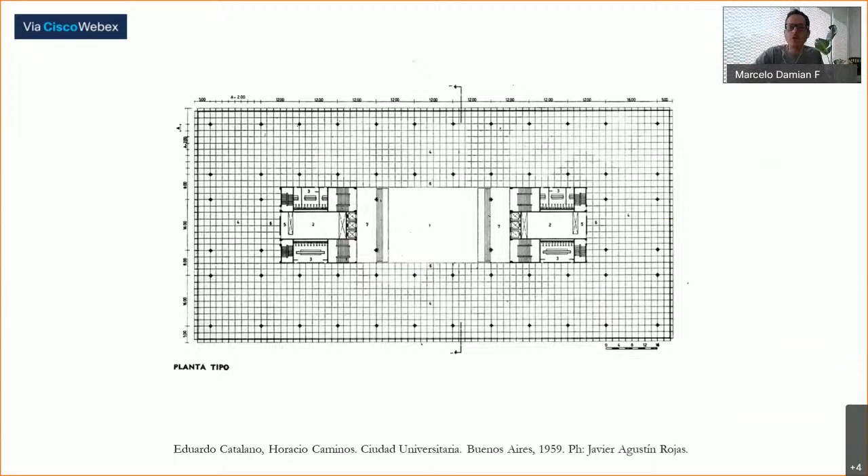So all the theories that we were taught about this building didn't fit well with our point of view. So that uncomfortable situation, uncomfortable in terms of strict discipline, pushed us forward and made us try to see the plan of this building as a strategy for indetermination of use. Maybe closer to the radical Italians, Archizoom or something like that in our minds, rather than other signs of functionalism, rationalism, etc. For us, this plan, this strategy, was a way to organize freedom. To let the contingency and the everyday life finish the work. Try to think about architecture as an infrastructure for the event.

So if our practice agenda started by creating a self-designed contract with the past, those stacked platforms were the best place to also observe the present, to see the things around you and also the things a little far away. So to choose a specific present was another moment of this same project. For us, Abalos y Herreros represented, like no other office at that time, a strong commitment with the present. The project still emanates an optimism that makes it possible to think that each occasion truly hides the possibility to develop an architecture capable of moving us.

Through a national competition for students, we had the chance to spend three years doing our PhD and working in Spain, close enough to see with our own eyes the production of the offices that captivated us. Of course, not only in Spain. For us, every weekend was a chance to rent a car, drive a few hours—not so many from an Argentinian point of view—and with a lot of time and a lot of faith, jump over a fence to see with no invitation at all how things were being made.

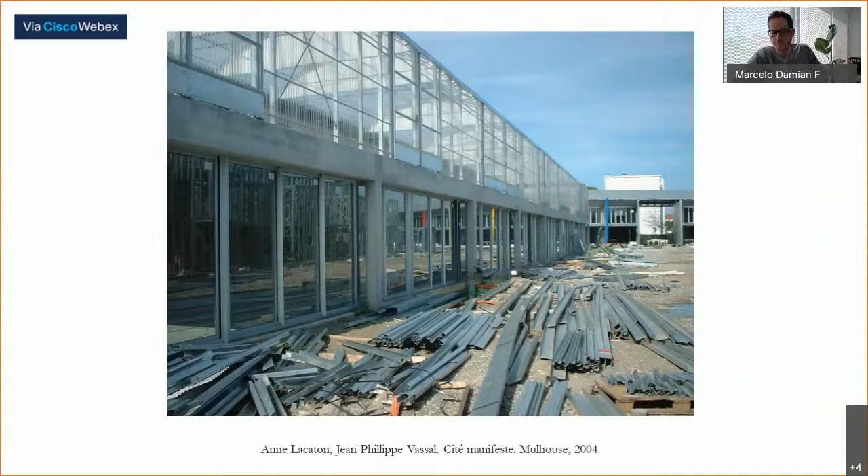Visiting Mulhouse housing by Lacaton and Vassal was very important for us to find out about the possibility of creating a consistent practice, focusing on things that you can insist with, things that you can try over again and again. At that time, we were sure that we wanted to have a practice that let us practice architecture. That seems like a simple idea and kind of obvious, but we believe it is not.

Because for doing so, you have to choose the right position, the right environment. For us, it meant looking back from the distance at Buenos Aires and trying to see it in a totally different way, focusing for the first time on those thousands of plots floating in the air. For us, those infrastructure leftovers were privileged places related to the sky, the only natural element you can find in this big sea of concrete. So this was the place we chose to build our version of a primitive hut—not in the natural soil, but on top of the city, surrounded by it, but without any urban references.

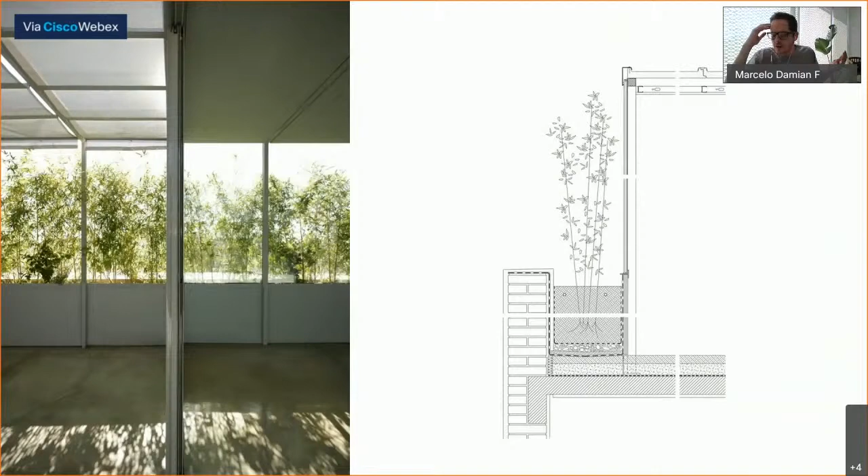So the pavilion steps back from the edge of the building in order to create a perimeter of plants that filters the light. We used the same structural design for two kinds of spaces: a filtered exterior on one hand, and a gardened interior on the other. This primitive hut is nothing but an open plan related to urban hedonism, with no specific use or program, because the existing organization already solved that problem.

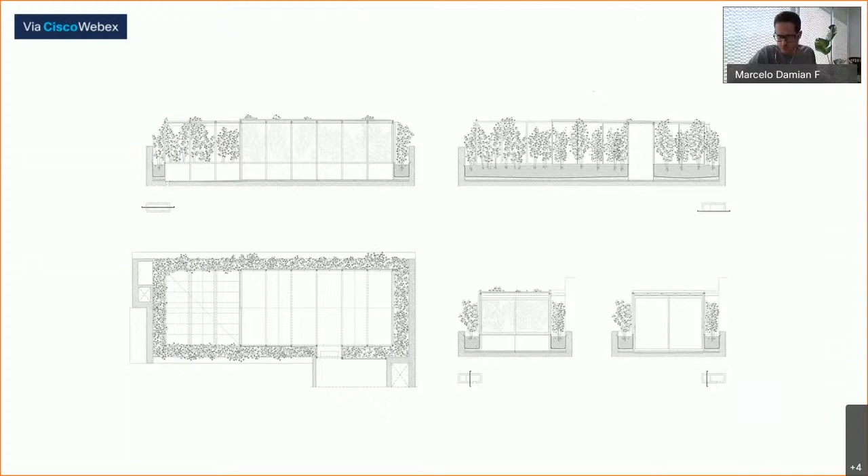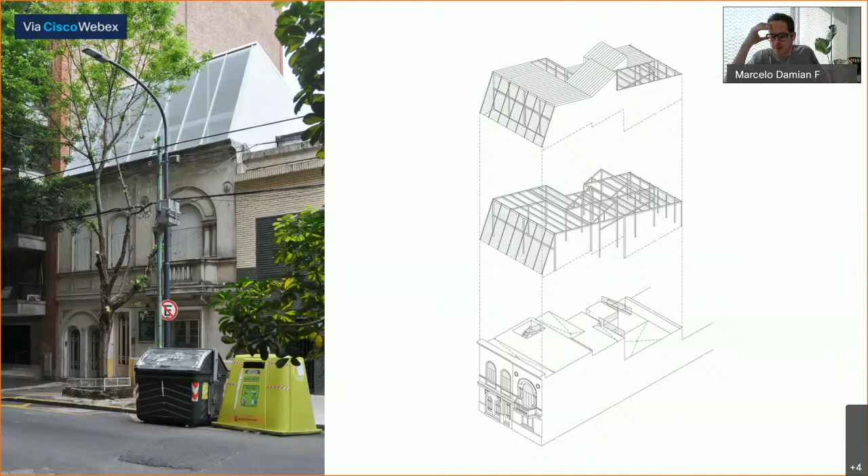These are the plots that I am talking about. This was the place for us to rearrange the design tools that we discovered through our conversation with the past and present of the discipline—working with the same light elements to build a roof that the house never had, a roof made of air. Using the urban fabric as our earth crust, finding this new incredible topography, like finding a sloping new ground in the middle of the Pampas plain soil.

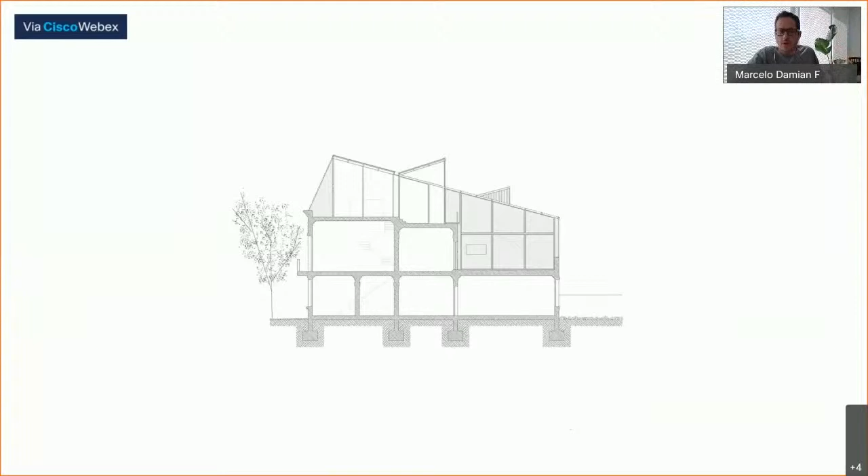Again, the typical house already existed, as you can see in this plan on the bottom. So this is about adding a big room with no specific use, structured by three patios—one you can see here on the left, another in front of the observer. It is built with a metal mesh and glass that tries to dilute the interior and exterior, using the same concrete floor and the same steel structure in order to create an atmosphere related to a new landscape that is the interior of the city block.

You can find it there through the transparencies of the metal mesh, or even in the reflections of the glass. So from this point of view, the discontinuity of the city fabric could be an opportunity—an opportunity to try to capture a big amount of air.

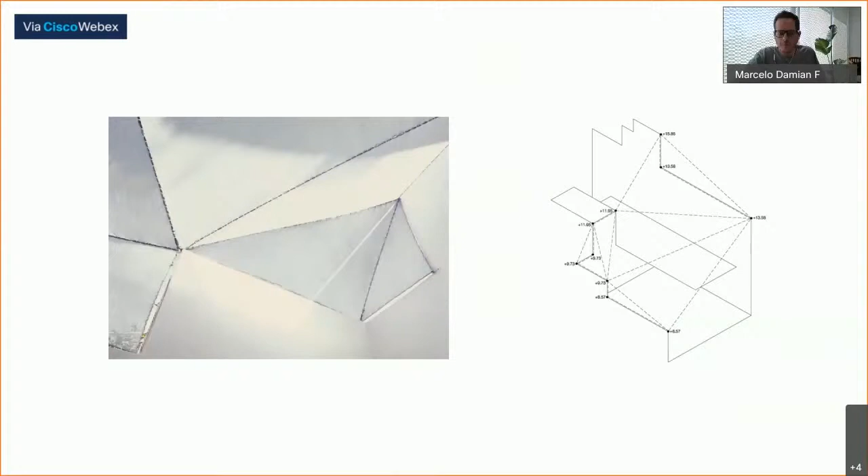And use every party wall accident to find a specific geometry for this permeable roof—a permeable roof that protects you from the sun while creating intimacy in an outside room, made with a very cheap agricultural plastic mesh. That is how this device is made.

So changing the way you refer to things can be a powerful design technique also. Once you uncover a former water tank, you can call it an air swimming pool. And just like this, the second after, you can enjoy your neighborhood from a new point of view. You can enjoy the trees totally differently.

So in this scenario, every element starts to share responsibility. That's why they start to become lighter. And that's why you can have this glass room—only because you have a shadow device on top of it.

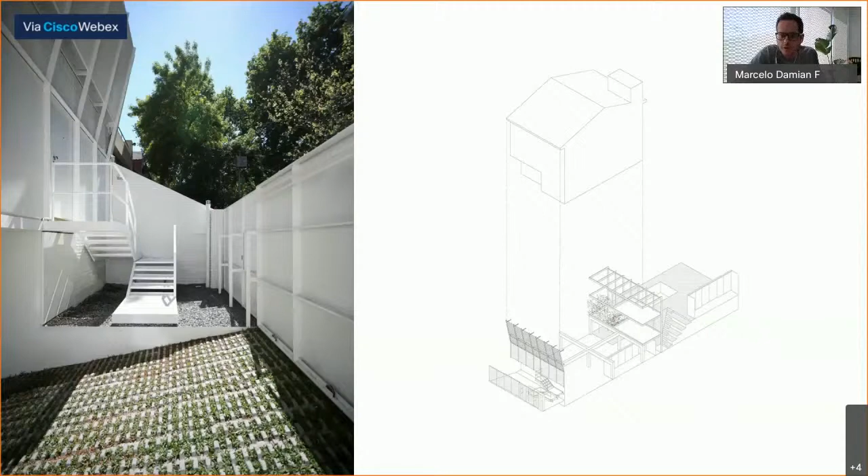We also had the chance to test this same idea, these same materials and programs, working not only on top of an existing building, but in this case by the side of it, next to it, and also below it, as you can see here.

When taking away the obsolete machines and the big rooms that surround them, in order to connect the street to the back garden of this 70-year-old townhouse, we also added a three-meters-deep pavilion to improve the circulation of air and the circulation of people—also adding another stair, and connecting two gardens, the exterior and the interior, using this same pavilion to contain the existing pool while creating a porch or a terrace.

Well, this is a little far away from Buenos Aires, in a productive landscape. So those pavilions are infrastructure pavilions, actually, that were made for feeding bulls and cows. So this is, again, moving here the same kind of room I've been talking about, but not on top, not by side, but in this case, inside an existing structure.

Bridging the existing pavilions in order to create a single house. So you can cross the patio to take the stairs and take a look to the Pampas plain from that terrace, and then turn back and get inside this kind of loggia.

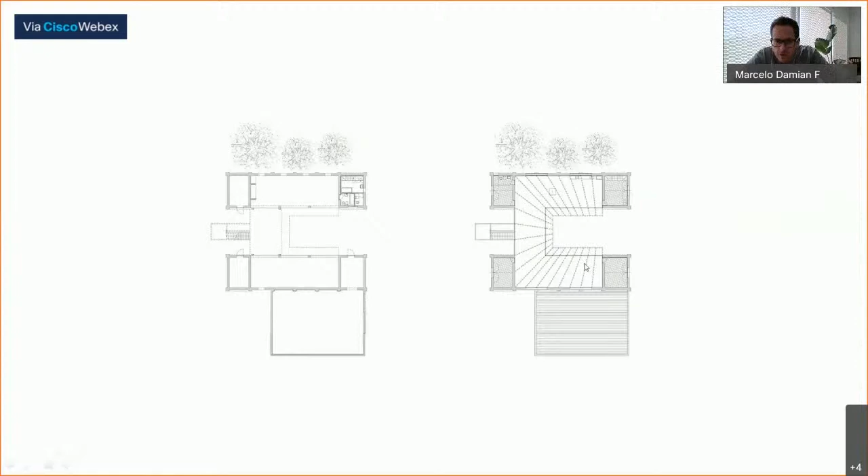Those are the plans. So the four towers the structure already had are used to make four rooms, to place the bedrooms and some bathrooms, and then to create a single open space with radially arranged beams, as you can see here, in order to dilute those through the three parts of this composition.

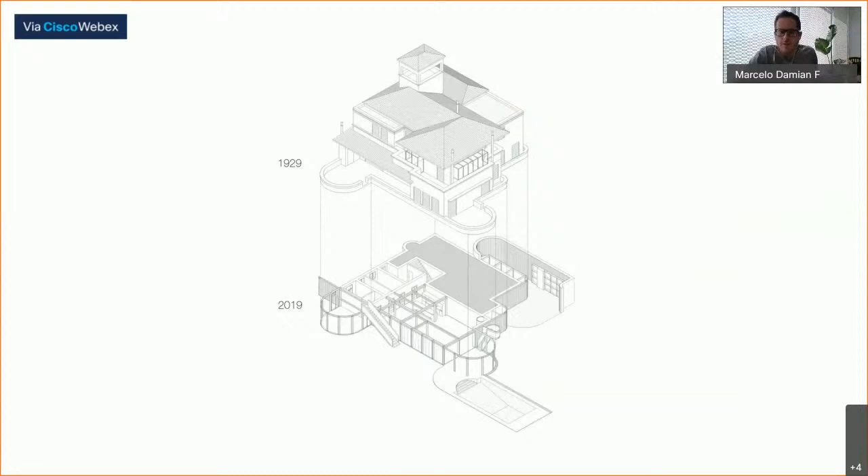So maybe the last iteration that we did of this kind of room, this kind of program, this kind of addition or subtraction happens under a very old villa, very old for Buenos Aires, of course. So this was the existing relation that villa has with its garden, that from the piano nobile. That was the typical relation that villas offer in the beginning of the 20th century, with a distant and contemplative relation with nature.

So we discovered again that the basement was obsolete, full of service rooms and engine rooms, that it was made of massive load walls made by brick. So for us, that was the opportunity to create a new contract with the house and the garden.

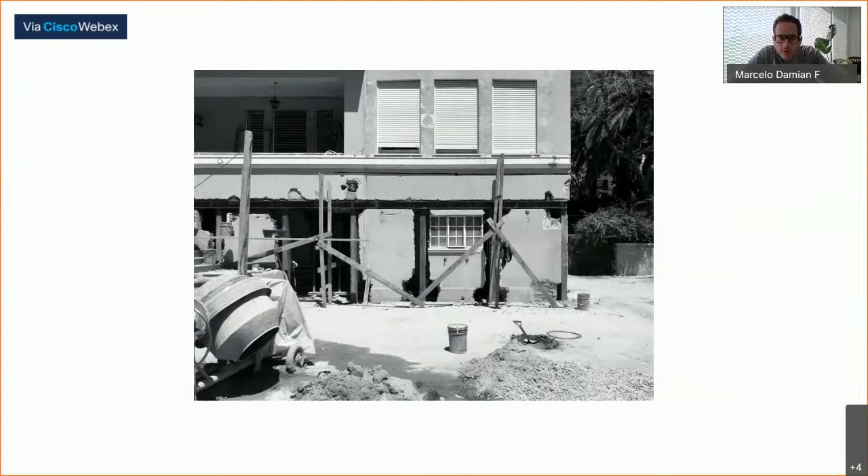So we literally cut the house here in this line. So you can understand our intervention by following this C-shaped structural beam that only touches the ground in the new entrance and in the new stair that we created.

So storage and service room program are behind those corrugated panels. And this garden that you can see here was a former asphalt driveway to the mechanical workshop beneath the house, and also to the driver's bedroom. It was a really big house, but this was what we wanted to achieve, this new horizontal relation with the garden.

Well, I like to think that while our practice is informed by the work of others, it becomes particular. At the same time, it overlaps to a specific occasion.

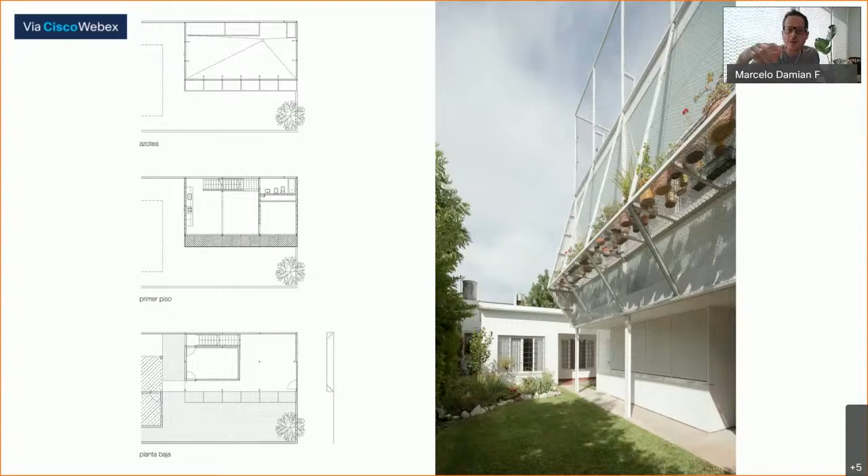Also to create a cover entrance for both houses, and also for elevating the new house main rooms. Elevating some plants too, while creating a safety device that has to be essential at the same time.

So the 90-degree rotated pavilion from the street alignment is in order to catch the best views to the neighbor's garden, and also to try to catch the best light.

The interior, it's a big portion of air, where furniture plays a very important role to define the use of it. And the last room, it's an open air observatory.

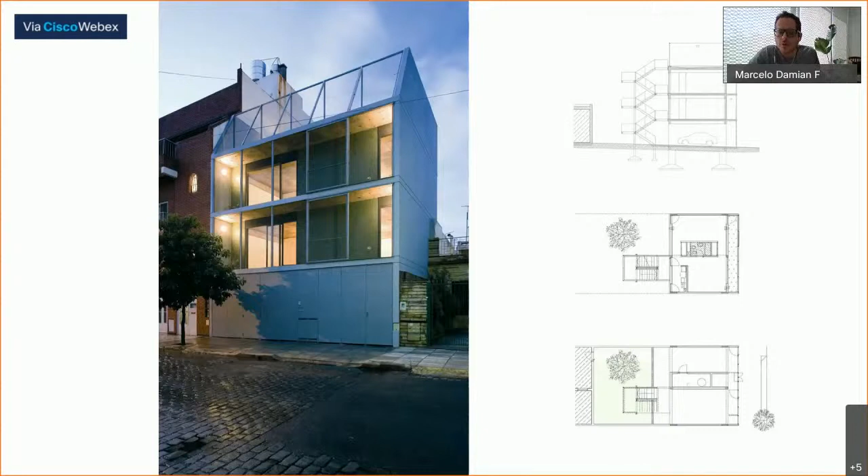So this other construction that is also part of the same group occupies the front patio of a small factory that still works on the back of the same plot, owned by the same families that actually live in those new two houses. So the ground floor has two entrances, one for the factory, the other for the house.

And there is an exterior stairs that connect the garden with the houses, with the terrace. The houses are very narrow, so we are using the trees of the street as an internal wall.

With a very light and cheap enclosure that climbs up to the top to create another open air room that works as a terrace, as an observatory.

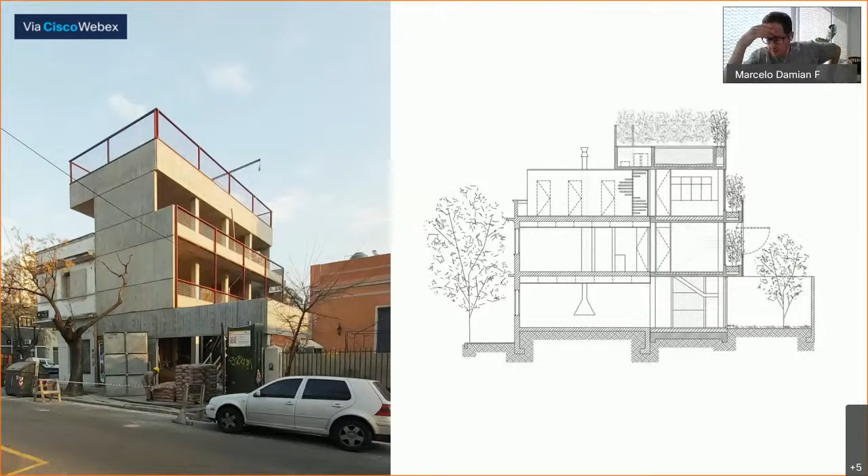So the last of these small urban pavilions completes an old house, bringing there more space, like this patio and a bedroom, and adding new leisure programs to it, like this pavilion connected to the terrace, and also a pool that acts as a roof also.

So this is where the roof of the old house becomes a terrace that connects itself to a pavilion that can be completely open and has the most fresh roof you can have, like this big swimming pool on top of it.

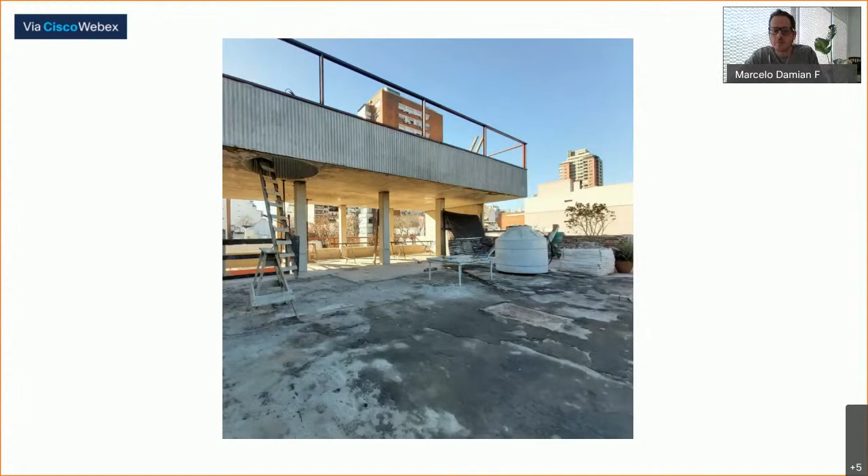So there's a possibility that at this moment of the presentation you start to feel a little déjà vu, like when you try to focus on one building represented in an image, other buildings or fragments of buildings start to appear. For instance, in this image is the idea of the modern curtain wall.

The last studio we did together at the University of Buenos Aires, when we used to talk with Sebastian—now we still talk together, but in different places—was called Workshop for Project Technique Actualizations. The main idea was that the project is a form of knowledge that you can learn, using other architects' design techniques, knowing that they won't fit perfectly in your present scenario. So those little differences produce small forward movement, rooted in the discipline but fueled by day-by-day contingencies.

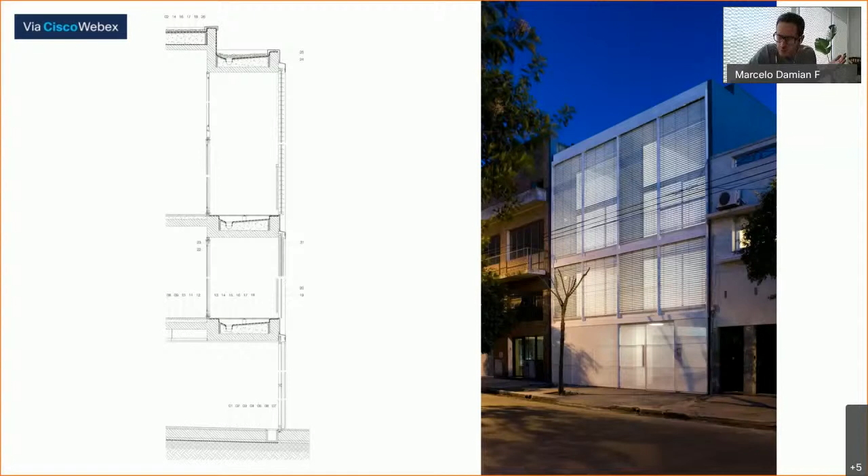Nowadays we know it's better to move the glass or the window from the perimeter of our buildings in order to protect it from the sun, for example. With that little movement, the whole composition changes, creating a different relation to the exterior.

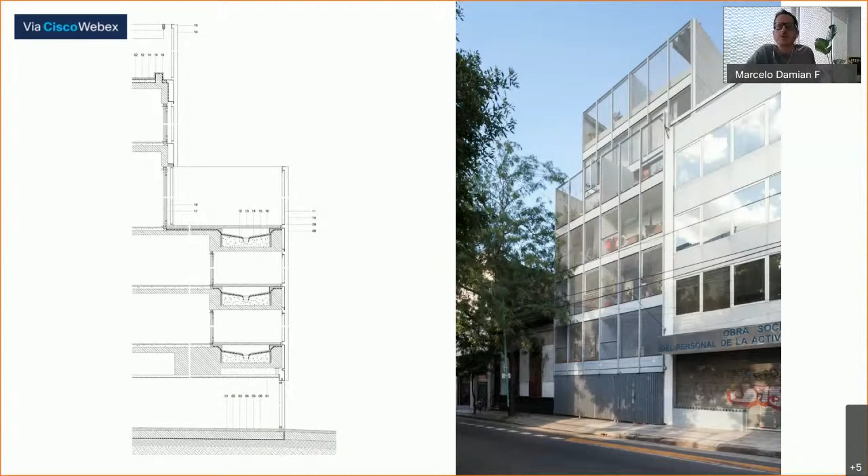But also in Buenos Aires, as I mentioned in a previous project, you need to provide some safety devices in order to have fully glass openings. So this kind of hybrid curtain wall creates safety, of course, but also a translucent kind of intimacy that can filter a very ordinary landscape and transform it completely.

If you look at this image and start to think about the natural circulation of air that goes across those metal mesh, the Alejandro de la Sota Alcudia houses immediately appear—but only appear through the description that Iñaki Ábalos did in his book, The Good Life, right?

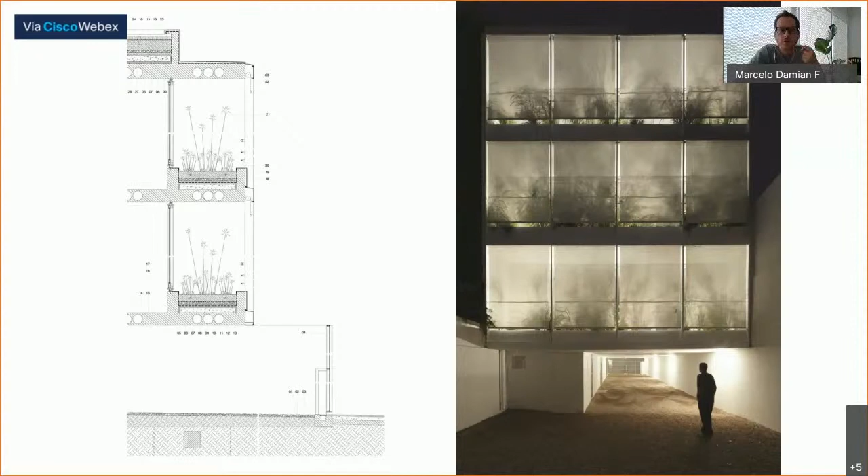So for us, that's what we mean by project technique actualization: to work with ideas and try to develop and overlap them into unimaginable situations. Designing the air by adding humidity, by creating shadow, or adding new smell to the air can be a different argument to rearrange the things we already know. It's a good way to start studying all over again in a totally different way.

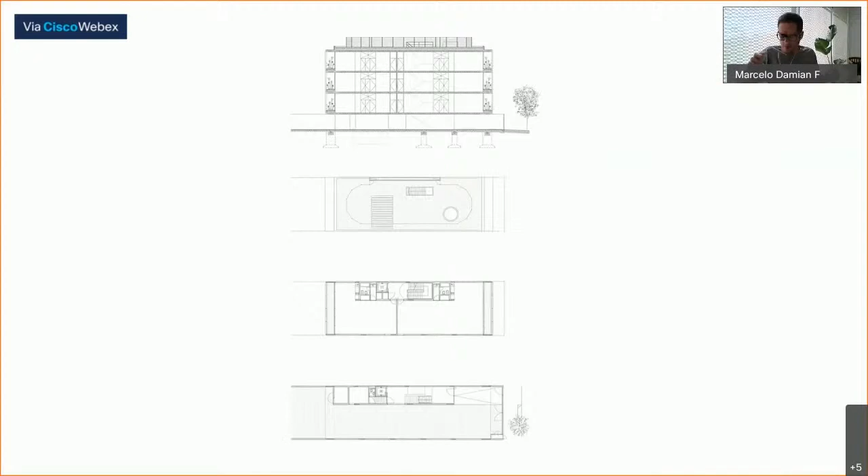So it's not that we are forgetting about solid elements. We are coming back to them with a different perspective, a different point of view. For us, this point of view is a good shortcut to design structure and envelope.

So that's our office inside that building, with the facade gardens that dilute themselves into the trees.

As you know, it's a Hilberseimer vertical city fragment, designed by his former student Bruce Graham. In the end it's a gradient of distances between the core and the envelope, divided into thirds: parking at the bottom, offices in the middle, and apartments on top.

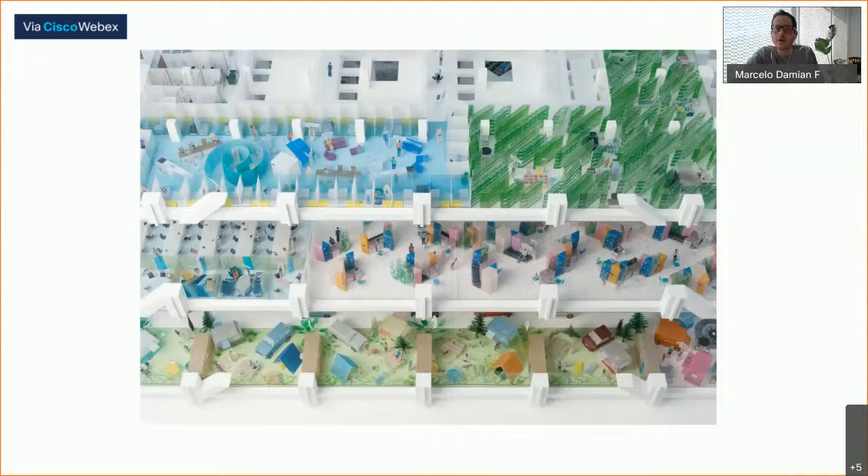So we tried to mix productive hydroponics inside domestic landscapes. For example, we also superposed a co-living scheme onto Hancock's organization. We tried to reinterpret the 60s kind of modular office furniture system, including leisure needs, or tried to blur the limits between working and learning at the same time.

We tried to think how a parking can evolve into a camping, or how a parking can produce urban life at the same time. For this experiment, we had the help of Pia Castro de la Torre, who designed and produced all the objects and subjects. For us, this was a great chance to discuss contingency and become script writers for a moment. But in the end, what we discovered was like another material to build with.

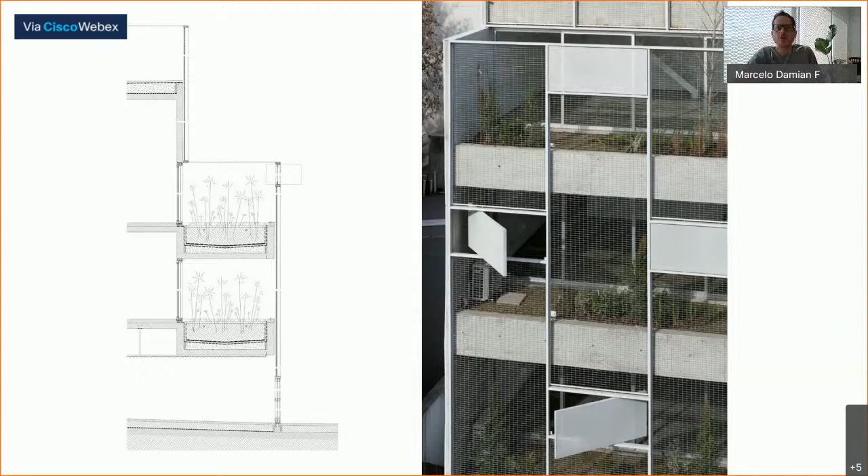So this next project is maybe the crystallization of that conversation. Again, there's a new version of the elevated gardens, a new version of this permeable curtain wall. It's like another iteration of the same things we are trying to work with.

Behind the permeable curtain wall, behind the elevated gardens, behind the glass, again a big volume of air circulating from side to side, waiting for its occupation. The plan is organized in strips: the technical in the middle, the garden in the perimeters, and the open space in between.

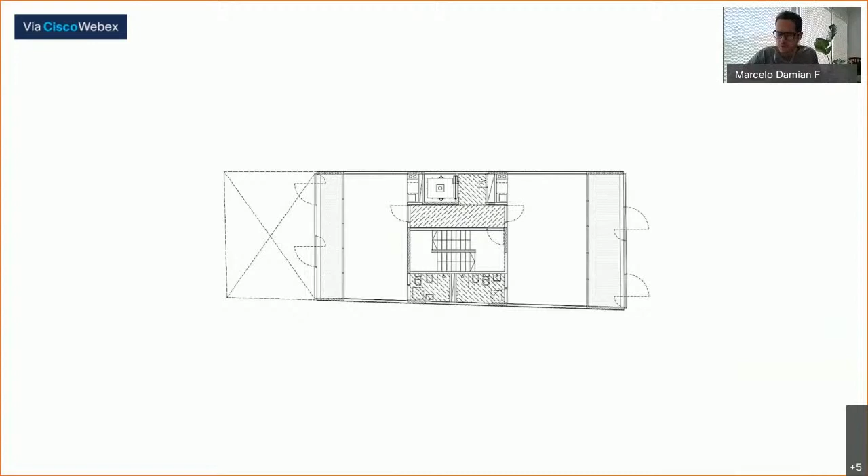So this could be the typological evolution of the kind of buildings that Buenos Aires is made of, but a little bit more permeable, perhaps, and open to different uses.

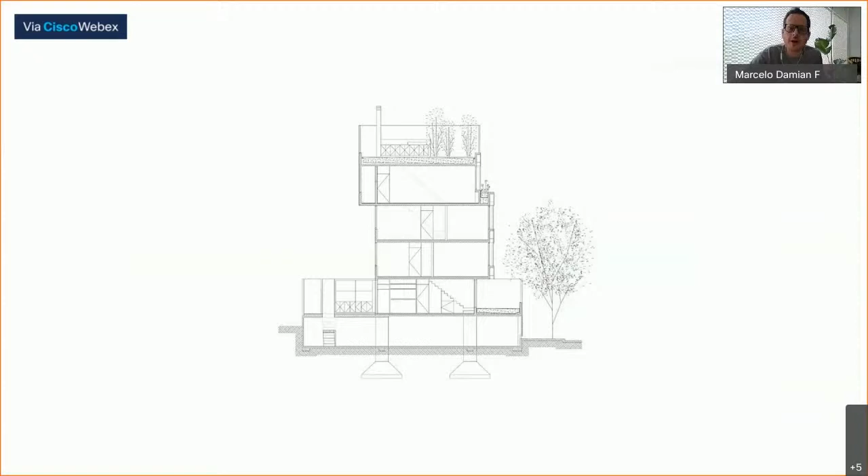So the whole building is wrapped with a ventilated facade with aluminum curtains, and those are the circulations and the patio I described before. You can see that these are not apartments at all—they still feel like houses, with very fluid spatial continuity.

Related to two kinds of patio, compressing the surfaces in the walls in between, and climbing to those bedrooms on the first floor. So those houses are also related by patio. Those patios are elevated from the ground, but related to it. And then on top, you get inside this plan, go down to this one, and go up to the third. They are very simple organized plans—simple, but not easy to do, I must say.

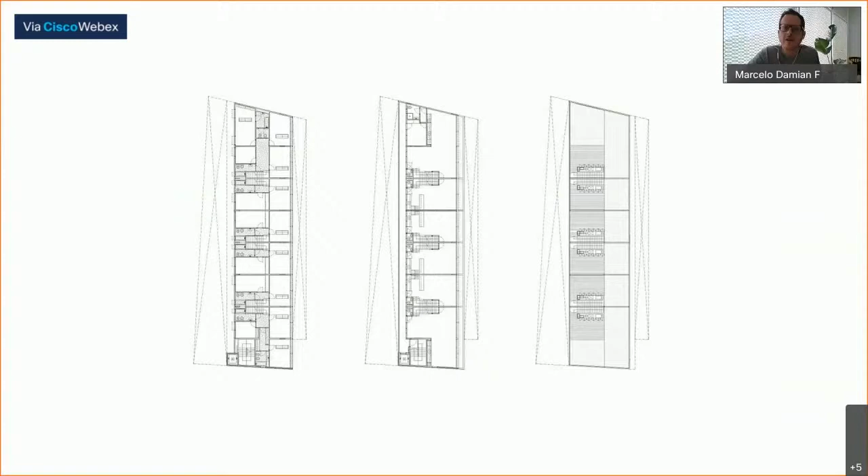So those are the bedrooms, and those are the terraces I talked about.

So at the same time we were working on the naturalization of the city, we were doing the first block of a mixed-use, mid-density urbanization that we hope will become an alternative to the individual houses that destroy the periphery of Buenos Aires. This could be called an urbanization of this kind of landscape. That's what I'm insisting on, these opposite ideas between those projects.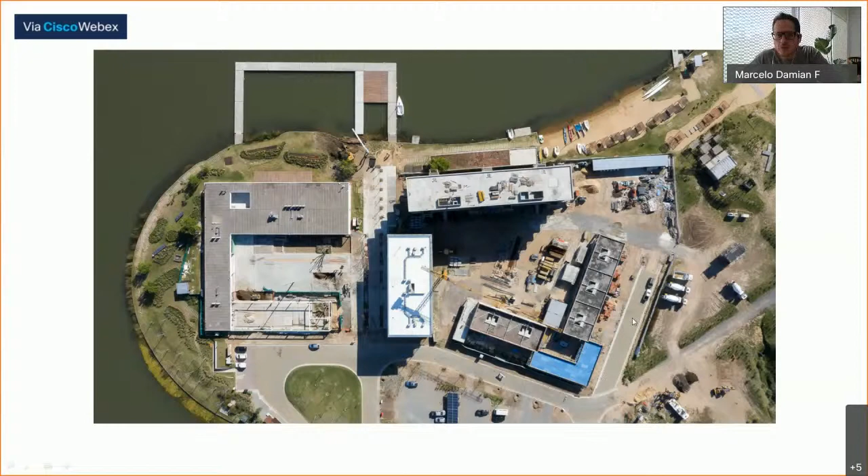So instead of thinking of the block as a consolidated solid, we worked on a group of buildings arranged in such a way that the central space can be open and accessible.

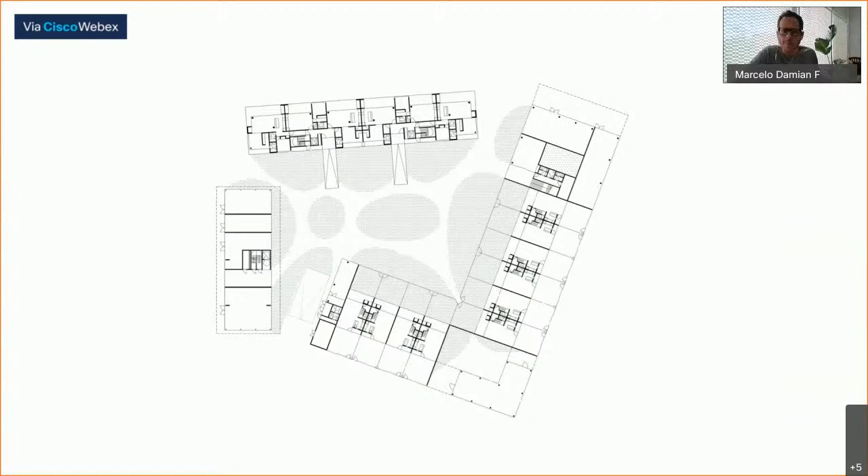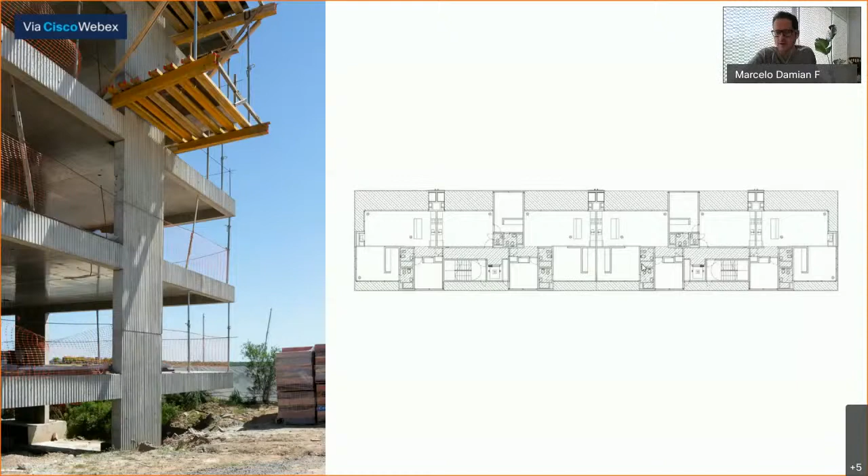So the apartment block faces the lake. It's structured from its perimeter element. Those elements, as you can see here and also all around the plan, organize the barbecues and the kitchens and the terraces, big terraces, also the fireplaces and the services in the back, leaving the rest of the perimeter open to the landscape.

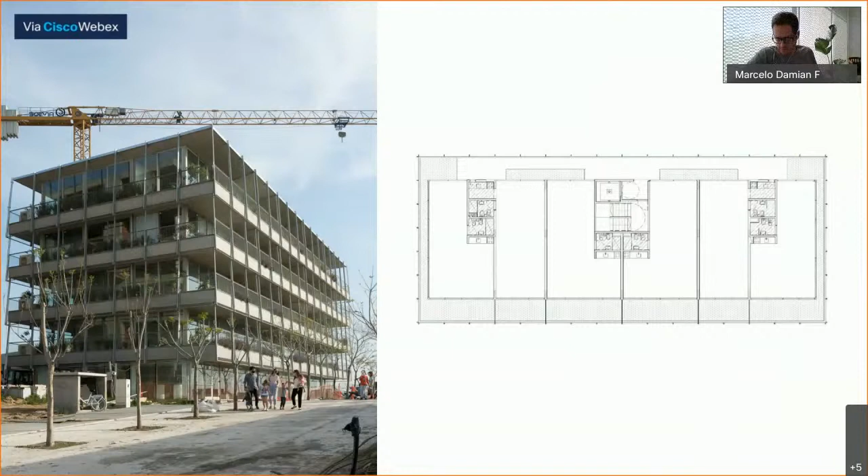We have finished this block. We have finished one of those buildings—it's a service building with commercial spaces on the ground floor, and small workspaces that are wrapped in the gardens we've been working with, but on the four sides of the pavilions. So the same solution we are offering to the terraces, we are giving to the open air circulation.

So those are the circulation with the plants that move very close to the windows. There are no doors, just sliding glass panels in order to get in and connect the units with the other part that have the same size, which are the gardens next to it.

Well, to finish this presentation, I would like to show you a very small intervention that we did with our friends BAO in São Paulo for the last São Paulo biennial. We were requested to do a site-specific installation inside the SESC 24 de Maio, the building designed and built by Paulo Mendes da Rocha and MMBB.

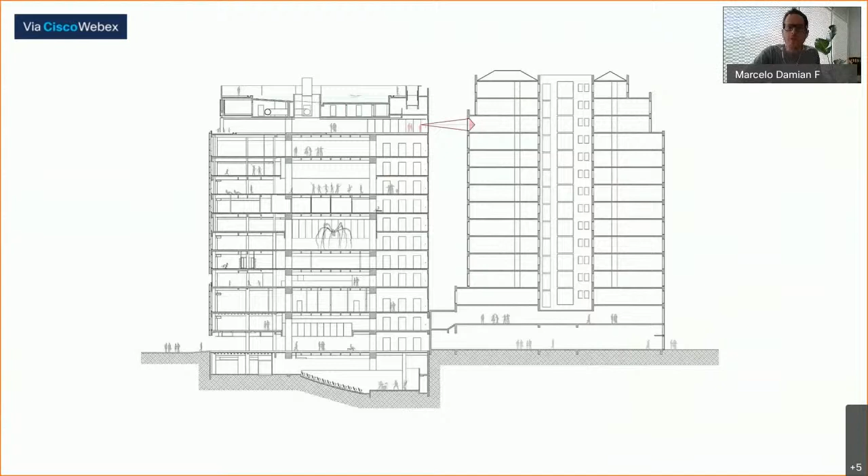The good thing about these public vertical buildings is that you can recognize your own environment for the first time. If you live in a very dense city like Buenos Aires or São Paulo, climbing up these buildings, like the terrace of the University of Buenos Aires I showed before, is a complete revelation for knowing where you live.

Knowing that these artifacts are a way to discover the environment, we wanted to do our intervention not inside the building, but outside. So what we did is rent an apartment outside the building, next to the big window near the elevator I mentioned. The installation consists of four mirrors that take the total dimension of the window, arranged in a kind of flip pyramid that reflects the sky, the streets, and the city around you.

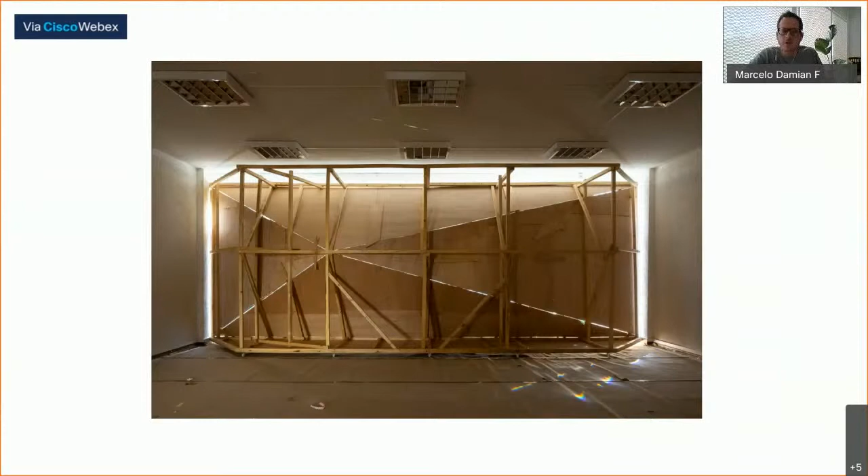So that's the back part of it - the infrastructure of that effect. But at the end, what you get to see is that the sky, the street, and the city itself, and even yourself as an individual, are part of this whole complex system.

I think that talking about those elements and showing them in that way is a good way to leave the conversation open, putting the main topics of this presentation on the table. Thank you very much.

I really thank you a lot for this project. For me, what is incredible is the intelligence throughout all these projects. I also remark the beauty of the drawings and the precision of the drawings, and I think that's also extremely important in your work.

Charlotte, I don't know now - are there some questions? It happens, there are some questions. So I want to tell everybody to think of questions again, and let us know either through the YouTube chat or the Telegram group. Thank you very much. That was very inspiring, and I think everybody wants to go to Buenos Aires now. They are all invited.